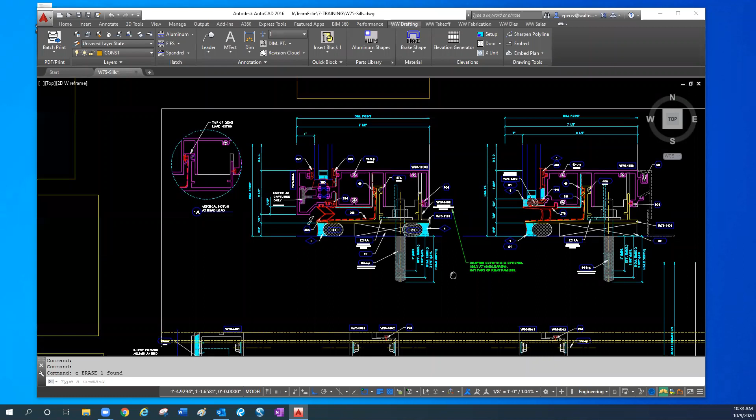Okay, so I'm just going to assume that you don't know anything, and that's where I'm going to start. Don't be offended if it's too easy or too slow, or if you know stuff already. I'm just going to start at the very basic, as if this is your first time seeing sill detail. So I'm just going to jump right in.

So you have the captured on the left, the inviso on the right. Obviously the glass is the biggest difference, as well as the face. What metal we're going to see versus not see.

You have the sill member, and this is where the terminologies come in place. So this body up here, I changed the color of the sill track itself to yellow. So the sill body, some people just call that the sill or sill member. Some people even call it the horizontal. But you have two different components that make up a sill.

There is some type of body, which is what the glass goes in, whether it's captured or inviso. And then the main part of the sill is this track. This also has various names and terminologies. People call this the sill runner, sill track. Some people call it a pan even. Starter track, starter sill. That's all relating and talking to the same part.

The reason they call it a starter track or starter sill is because this has to go in first. This yellow part is a field use item, and the field has to lay this guy out first, and it's not done in the shop. So everything related to this sill track or starter is all done in the field. That's kind of just a big separator between these two. So you have this sill runner or track that has to be placed first.

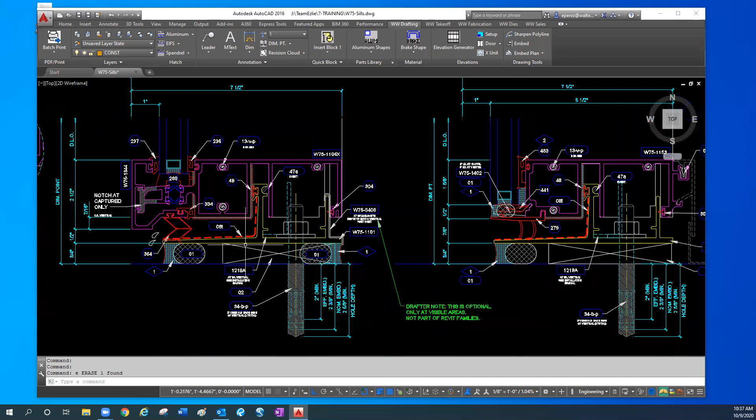So if I look at our vertical mullion, I'm just going to pan down here really quick. That index clip literally goes inside the mullion here, somewhere inside this cavity. And I actually think they put it in the bayonet raceway here. Okay, so if this were, we were looking at the top of that index clip, it would be right here at every mullion.

The reason why we need it is because you could see how we have this 1/4 inch gap between the verticals. So if we didn't have the index clip, this 1/4 inch could get smaller or bigger. These mullions could move, so it could accidentally be spaced wrong. So the index clip helps the field lay out the units next to each other, so that they truly maintain the 2 3/4 overall dimension from the male to the female. And so that's the purpose of the index clip.

Okay, so the index clip has to fit inside the mullion. So if you have a wider mullion, you're going to need a wider index clip. That's why we took off the notes here that said the size. We used to call out the size, but it was only true at a 2 3/4 vertical. But we've had jobs where sometimes they have a 4 inch vertical or a 3 inch vertical, and then you would end up having to call out all the different sizes, which nobody was doing. So that's why we now wanted to build the logic in the installation manual that tells the field, the shop, that they have to take the width of each vertical and size it down a certain number to get the size required per vert. So that's why we took out that dimension here.

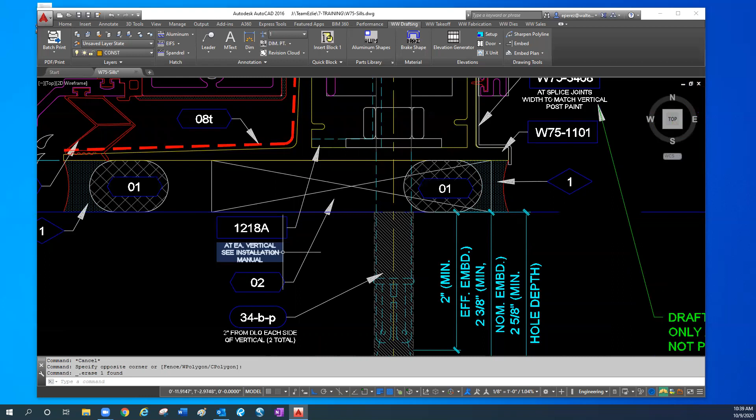Also, the height matters because this line down here represents the bottom of the vertical, so it has to fit inside it. As we've seen, when these mullions get taller, or these stack joints get taller, the bottom of mullion gets higher, then the index clip no longer works. So it has to have proper engagement to do its job. That's just something we have to look out for when we get taller sill tracks and taller sills, to make sure this index clip is fully engaged properly. And that's why some jobs we had to go with a taller index clip.

Okay, and this index clip is only shown in the sill. So I have the little ISO from our manual here to show what we just talked about. So you have the bolts that go in sill track to sill track. This is 2 different sill tracks. It's what we call our splice location, where 2 pieces come together. I haven't yet talked about the splice sleeve. And then here's the index clip, just a little visual, that it gets pre-attached to the sill track before they put in the units.

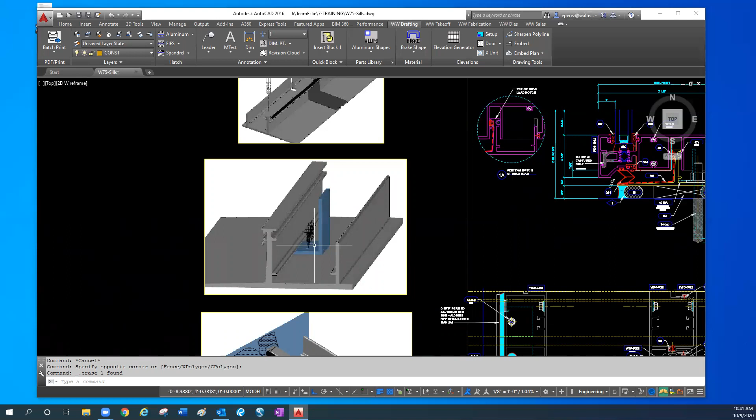And again, that's all done by the field. So they have to lay out all the mullion layouts to know where all these index clips need to go before they can put in the units. And it's just attached with 2 fasteners, 2 little screws.

So the other question that comes up sometimes is, we've seen it in a lot of details where the engineer wants to beef this up, or we've seen some where they put 2. It's just because they're worried, or they feel like this clip is taking a lot of movement and that maybe the units will shift. But again, that's where the logic doesn't really hold true, because it's really just an index. It's not structurally doing anything. So that's why it's a little odd when the engineers do that. But that's something Jumpstart needs to figure out and talk with our engineers, because really this clip is not taking any load. It's just truly an index to space our units.

Okay. All right, so then we'll lead to splice sleeves. So again, as I mentioned, this sill track can span 20, 25 feet across an opening, and then it has to stop, and then another one has to start. So again, we have a splice between 2 parts.

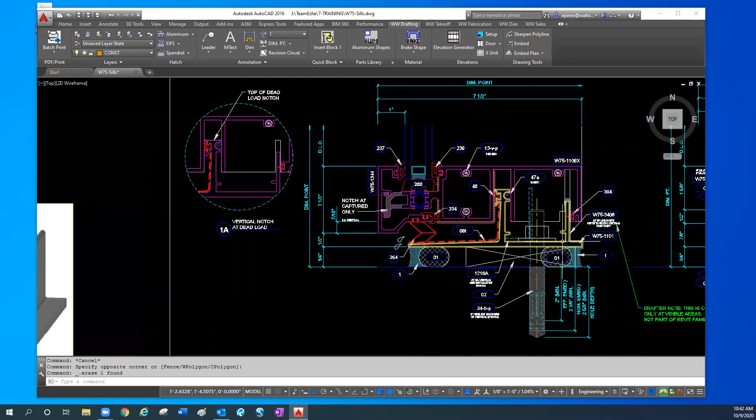Usually that splice gap that we leave between the 2 parts is a 1/4 inch. This red dot here, the 08T, that's our splice sleeve and how it's shown in this detail. And then here, I just wanted to show you the ISO of it. So that red line represents this little black sleeve.

That's basically called Dow 123. It's a silicone rubber sheet, basically. If you imagine a big white rubber band that's flat, that's what this material really is. We model it in our details like this as black, but really it's clear or white.

If you see it out in the field, they just smother it with sealant. The reason they have to smother it with sealant is because water can get between any little crack. Now that you have two pieces together with a big gap, you want to make sure all of those gaps are covered so that water won't go through those cracks. So they will cover this whole thing with sealant. Even though our drawings show it all nice and pretty, they really just smother it with sealant.

And then they have to smother going up and over what we call the chicken head of the sill track, so that if by chance water pools up in this cavity, it won't go up and over, because behind the sill track has to stay dry. That's what we call our dry area.

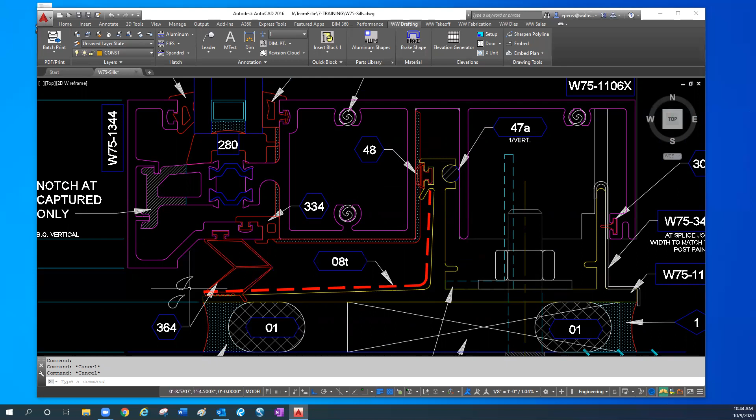We are allowing water to be in the front cavity, and we expect it to weep out. So if we go back to the detail here, we are expecting water and allowing water to come in this front area in front of this gasket 48. And then if any water comes here, we're expecting it to drip out. That's what these little drips usually we show in our details. It just shows if by chance any water gets in there, this is where we expect it to come out. And we're okay with water being in there.

That's why that sealant at this splice sleeve is super critical, because we don't want to let any water come up and over, because once it gets behind this chicken head, now that's basically a leak. That's where we can't have water back here.

Why don't we call the sealant out? Like, or is it just known? It's just known. So that's why it's kind of in our installation manual.

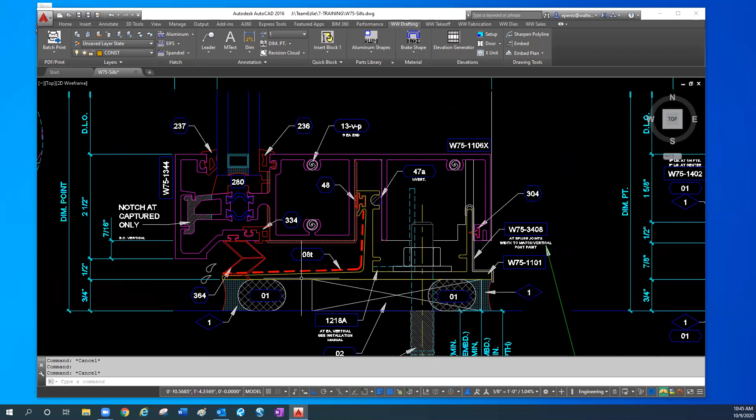That's one of the field installation steps they have to remember to do. In our installation manual we show it and say bed in sealant, and they just know that's part of their training. All splice sleeves, fully bed in sealant. But we don't show it in the drawing. There's stuff that's happening that we don't always show, and that's just for clarity, because otherwise this would just look like a big smother of sealant and a hatch, and you won't really see the detail anymore.

Okay, so that's the sill track and the splice. So then just to go over these gaskets a little bit. Gasket 48 is what we would call a dual compound gasket, which means this back part is one segment and this is another, so you can see why the lines are drawn like this.

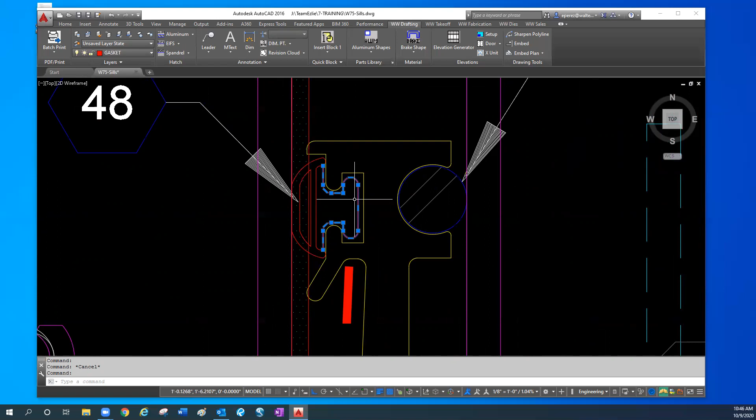This back part is like a hard plastic so that it doesn't move. It literally gets slid in, it doesn't get wedged in, it gets slid in across, and again, imagine 20 feet long.

So if I show you over here, that's what this is here. Sorry, bad picture. But the shop has to slide that in the raceway, and they just slide it in the extrusion the whole length. That's a plastic piece so that it stays put, because this is the critical water gasket.

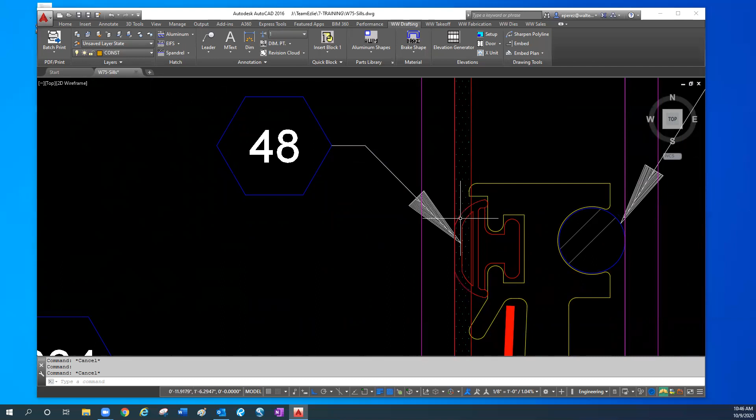And then this front part is actually squishy. It's a soft gasket durometer where it can squish, but the back is a hard plastic, and that's on purpose. The squishy part is so that when they install, it'll smush between - you can see how it touches the sill member here - so it can squish and won't be rough, but they don't want this part ever moving. That's why they make this a hard plastic, so that stays put.

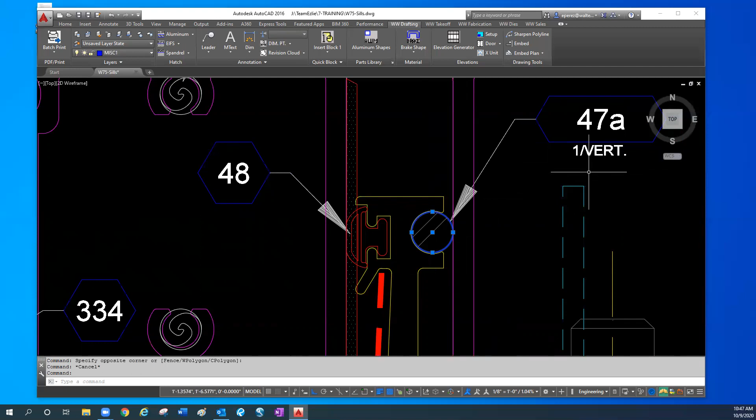Then you have this guy, this 47A. This is actually an aluminum rod. I don't know if you've seen one before. It's like a straw, but it's about this long, 4 inches or so, and it's an aluminum piece. We say 1 per vert, and there's been a little controversy on that, if they actually put it at the verticals or not. I'm not sure.

Sometimes they say, I've heard Kendall say, it doesn't have to be at the mullion. It could be just anywhere, because it's just to help ease of installation of the sill track so that it can kind of roll in its place when they're installing it. It'll kind of spin on itself so it rolls into place. The more it's done at a vertical, it's maybe more friction, so it doesn't have to be at the vert. I don't know exactly where they put it, but we call it out one per vert just for quantities. I don't know exactly where the field or shop puts these, their actual spacing, but that's the purpose of it. It's for install, and it's round so the unit can roll over it and not get stuck.

Okay, so far so good.

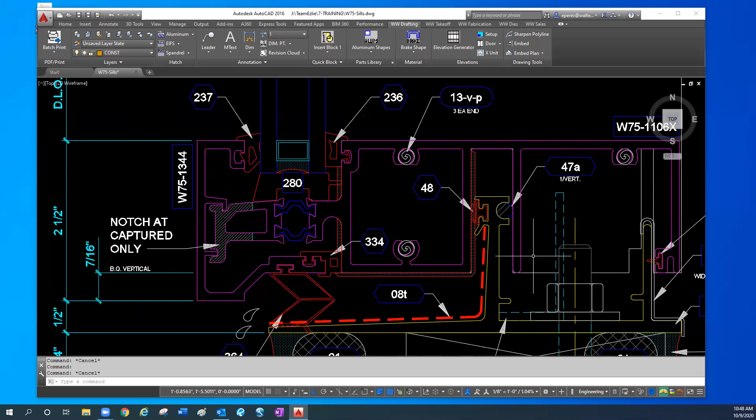And then the new little guy is this little thing here. This is a new design, copied from our Seattle office, and really all it is for is looks. Because if you imagine our little detail here, on the inside, if we don't have that piece, this is just a big gap, and they're saying that doesn't look good out in the field. So we came up with that design to just cover over this little splice with metal. That's all that it's doing. It's almost like a splice sleeve, but it's exposed, meaning you can see it, and it's made out of metal, not rubber, and it's only at these splice locations.

These splice locations happen maybe at 20 feet, so it doesn't happen at the vertical. That's where a lot of people get confused, because our 2D detail makes everything overlap, but you don't see the space. So it looks like it's hitting the verticals, but this is not happening at the verticals. It has no relation at all to the verticals. It's really just for the splice sleeve, at the splice locations of the sill track, which could happen mid-span of a unit, nowhere near a mullion. That's where the 2D details are squished, so you have to kind of see it in space and know where these things are happening in relation to the sill track itself.

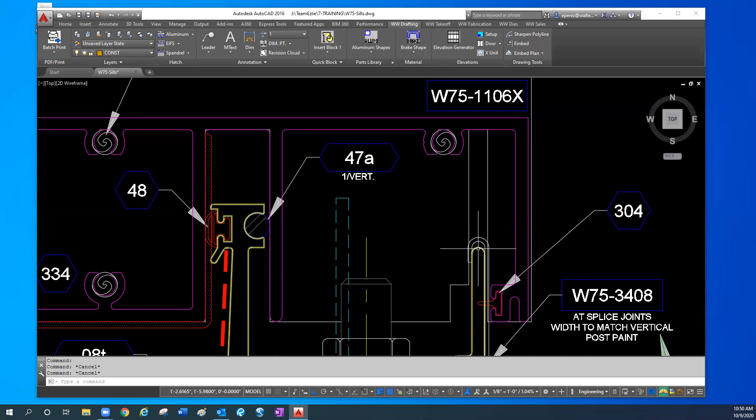Okay, any questions so far?

Okay, good. And then you've got this gasket here, 304. This is way in the back, and again, it's touching the sill track, so that's another critical seal. That's an air seal, basically, not for water. Air is going to get in here from just natural airs blowing, and this is helping prevent the air from being sucked into the building, so you don't hear whistling sounds, and it also helps prevent water, because usually air will suck water in with it if it's strong enough. So this is just our final line of defense for air and water, and that's a critical gasket for the system to work properly.

Okay, so that's the sill track. And as you can see, from Capture to Inviso, it's exactly the same. Sill track, sill runner, the logic is always the same. Like I said, the only variable is if the track gets taller, because of the different loads we're taking. So Captured and Inviso, everything's the same.

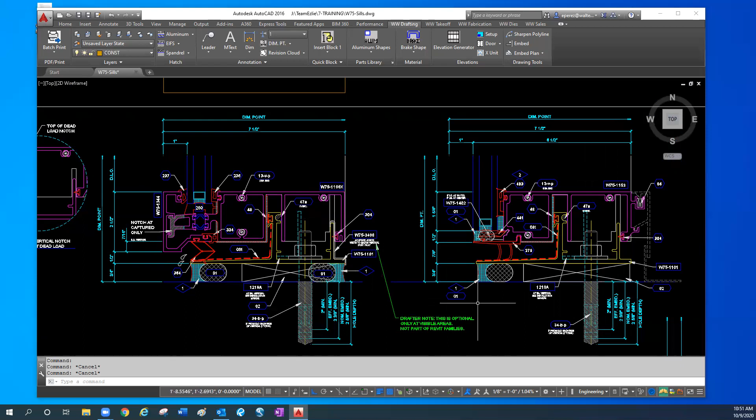So then this leads to the vertical, how it interacts with the vertical, and these notches here. You're familiar with these lines, which represent the notch in the vertical. Remember, this sill track runs 20 feet or so, and units are just going to go over it. So in order for the units to go over it, they have to be up and over to capture and go over these parts, otherwise they'll collide. These lines represent what's happening at the vertical itself.

As you know, there's a difference with a live load, which is when the notch has allowed space between the chicken head and the mullion. So this mullion is literally hanging, floating from above, and it's allowed to move up and down. That's what the live load is. And we have all these notches in here because if I move this down three quarters... oh, see, even that notch is the wrong size, see?

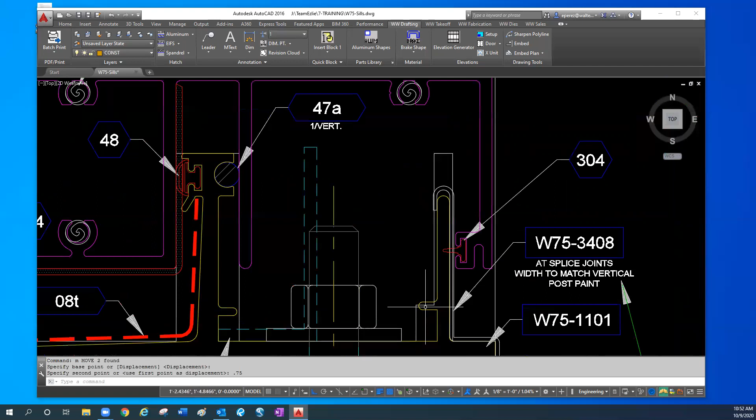But it's supposed to clear these parts. So in a worst case, if the mullion does move down 3/4 inch, which is the maximum, it should not hit anything. So something's wrong here with this notch, it's probably the wrong size. But that's how those size of notches are created, and that's the purpose of them. So then if I move this back up 3/4 to where it's supposed to be, this is how the system is designed for the mullion to be able to move up and down. And 3/4 is the max for this particular one.

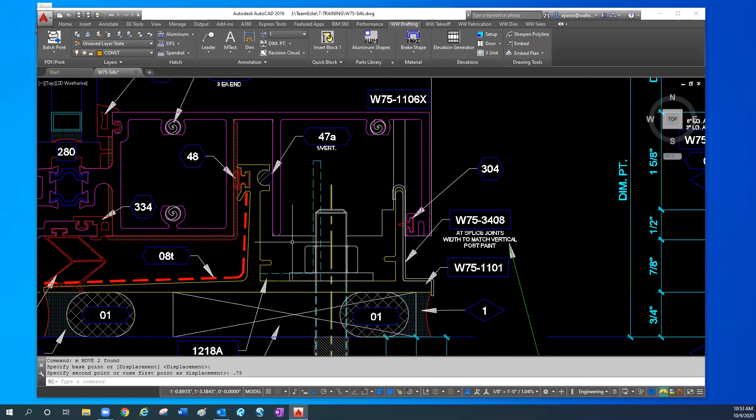Okay, just keeping that in mind, to talk about movement real quick. So remember, this sill member, the body, is attached to that vertical, right? So if the vertical moves down, this would move down with it. Let's see what happens, so I'm going to move this all down 3/4. Okay, so that's the worst case. So this gasket would get smushed, compressed fully, but you can see why we designed the face cover the way we did. See, so that it clears it in case it goes down that much. So that explains a little bit of the design and why we do that.

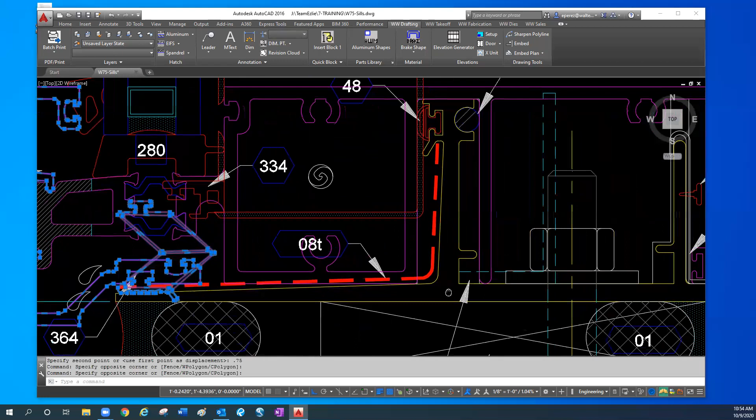And then you can see how critical it is that the sill body itself, the bottom of it, is equal to each other, you see? Right, so these back legs have to align with the bottom of that. Otherwise, if it moves to its worst case, it won't work. So those are just also little tidbits to see how the system is designed, how it should be designed. So if you see something where maybe this leg is lower than this body, we have a problem, right? Or if we see a captured face that doesn't have this offset, we'll have a problem. So it's just kind of giving you little insight into the design so you can see why, or if we have a problem, potential problem. But that's why it's designed this way.

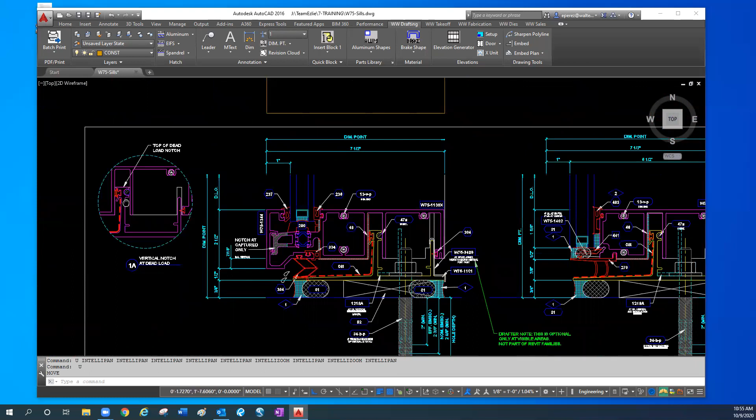Okay, so then you have the dead load notch, which again is the notch in the vertical. And that's where it's notched specifically to sit or rest on this chicken head. And that's where all the weight is going in this case. So now it's no longer floating and it's not expected to move at all. It's just sitting and resting on this part. So that's the only difference between wind load and dead load, the notches.

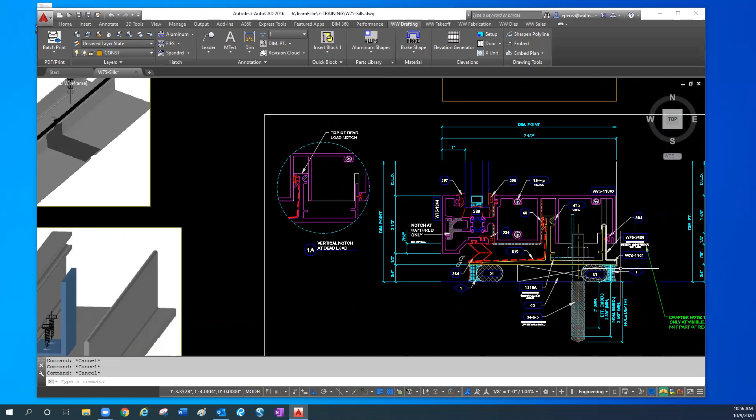So if you look in our details, again, we took it out. We used to show them in the side view, but it was just too cluttered and usually it was wrong. Okay, so you will not see an end dam in our sill track details. You'll only see the end dam in the jamb details. Okay, so this is your end dam here. Okay, so all of these lines, the hidden lines, represent the legs of the end dam. And I'm sorry, I can't see the back one here, but imagine this end dam has another leg sitting in this back cavity, just like it's detailed here. Okay, and then you can see that it's offset by 1/4 of an inch from the edge of the mullion.

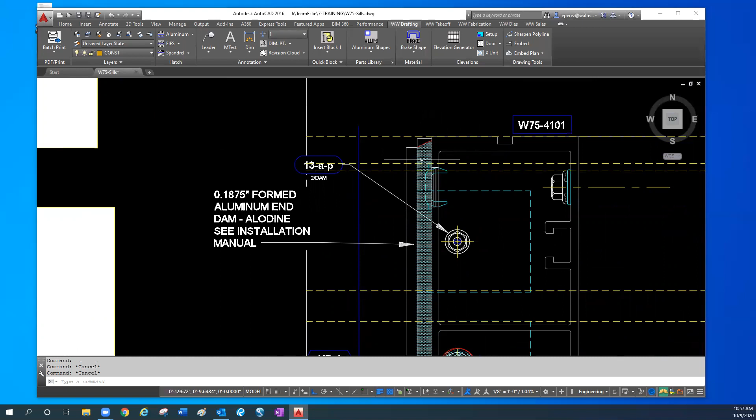So again, that's like another splice or a purposeful gap for sealant. So you can see we show all of this sealant here. So that gives the field a nice spot to put sealant and have space, because the more sealant they can put, the less chance water is going to get through. Okay, so this whole thing is bedded in sealant. So again, we're a little generous in our detail, but this is not even how the field would do it. They would smother it, again, completely smother it with sealant. Because you don't want any chance that water can find a little crack and get through, because when two pieces of metal come together, there's a chance that water can get through.

So they have to smother it with sealant so that water can't get through. Okay, so they smother it with sealant. And then again, there's a reason why the front fastener is sealed and not the back. Do you remember why?

So why do we have sealant on this one, but not this one? Because that first one is where the water would be. It's like the water zone, and then the back one should be the dry area. Exactly, correct. So there's a reason for that too, right? Sometimes people think, oh, just seal them both. It's like, no, this is intentional because there shouldn't be any water back here.

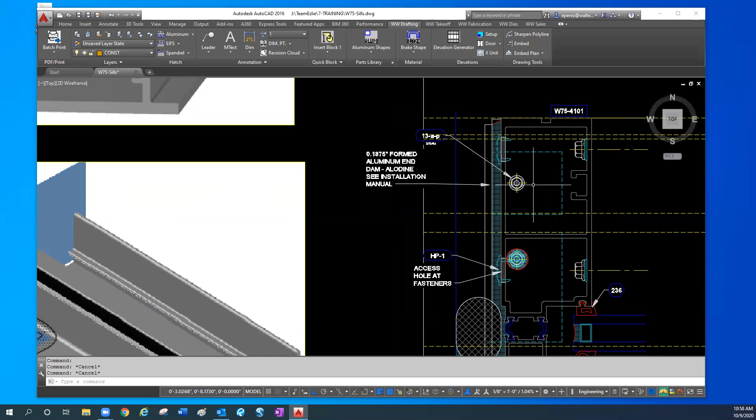Exactly, right. So that is on purpose, it's not a mistake. And that's what's holding this end dam in place, and it's attached to the sill track itself. So again, it has no relation to the mullion itself. It's not touching the vertical at all. It's strictly attached to the sill track.

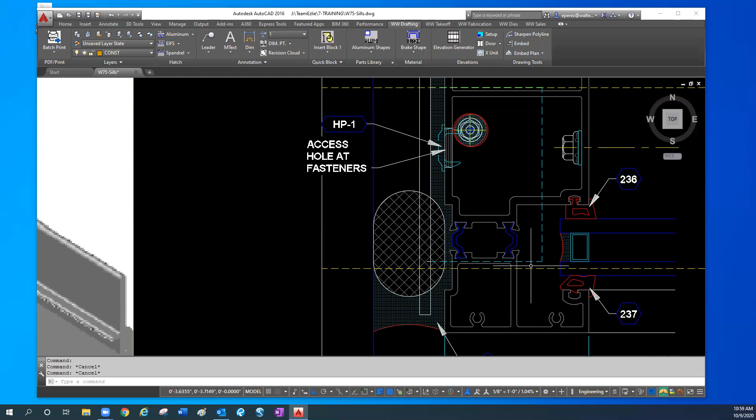Then the only other little caveat to look out for when we're talking about standards and end dams is this leg here, the vertical leg that's sticking up. So you can see in this detail, it's sticking out this much. And that's on purpose because that's where the sealant is going to be for this captured vertical. But when you have an Inviso, we chop that leg off. So that's the only visual difference of the end dams, if it's a captured versus Inviso jamb.

So that's just so that it doesn't stick out when the field is doing this perimeter seal. Because if you imagine on an Inviso, this sealant would be back here, and then this leg would stick out, and we don't want that. But otherwise, the logic of an end dam and everything's the same.

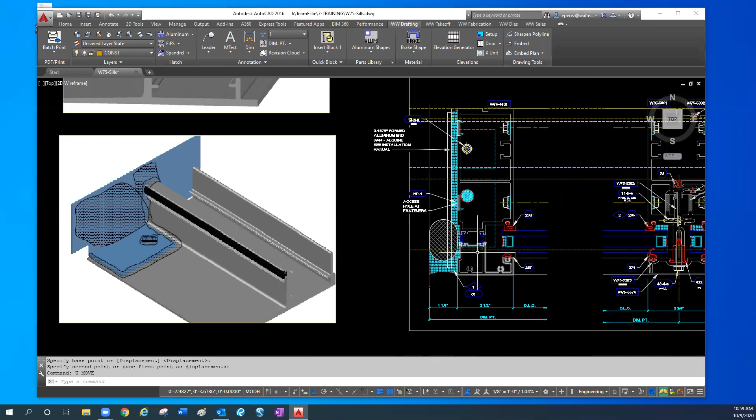Our standard is 3/16, and we recently changed it from Alodine to painted as our current standard. And it's painted black, I believe. Okay, so that's the end dam at the end. We went over the splices in the middle, index clips at the mullions, and the notches on the verticals.

Okay, so now we're going to get into a little bit of detailing, also logic, so that you can check it as well as understand how this relates to the vertical members that it encounters. I'll also show you a little bit of drafting tips, I guess you can say. So as I mentioned, you have a 2D detail.

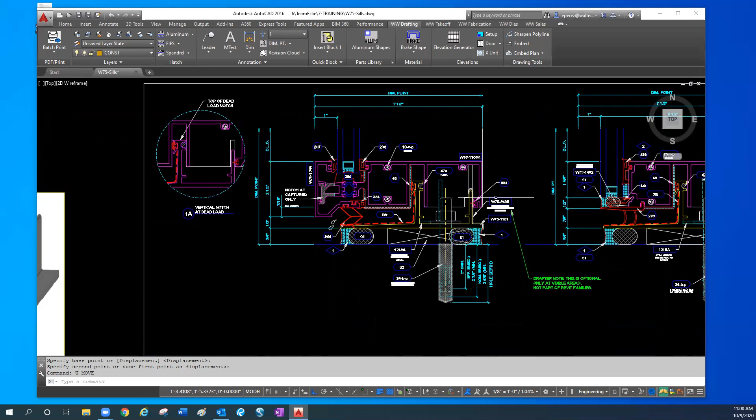And right now, if we just look at the sill track, there are no dimensions. We don't show any dimensions to it. So how do you know how it relates to the vertical mullion in our vertical details? The way I do this is I look for a point that's consistent. So in this case, it's the back of system.

So if I just draw my construction line from the back of the 7.5 system, draw that down, you can see the back of the mullion aligns with the sill track. So I use that as my guide. So there's the sill track. Okay, so I use that as my guide.

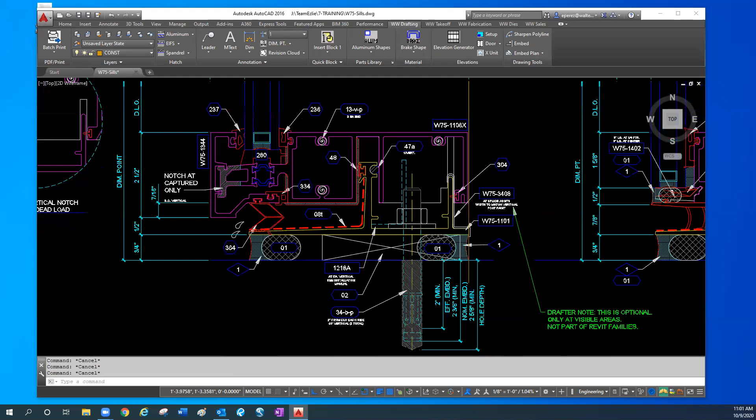So what I do to get this in relation to the verticals is I do a Control-C. I'm going to copy this sill track and use the back corner of the sill track because I know that should equal back of system. And then I go down to my vertical detail, and do a Control-V and paste it.

Here, let me just show you. I'll do Control-C, and take the corner of the die. Click on it. Okay, then I come down to my vertical detail, Control-V, and I use the back of the mullion as my reference point. But now it's in the wrong orientation, so then I'm just going to rotate it using the back corner again, just 90 degrees.

Okay, so now I have kind of an orthographic side view. So I'm going to just move it, make sure my ortho is on. But now I have an orthographic side view, and that's how I got these lines in the right spot. And those lines, as you can see, represent, if we were looking down on this sill track, we would see these edges. So this is where the back leg is, or this upturned leg. I don't know what we call this upturned leg.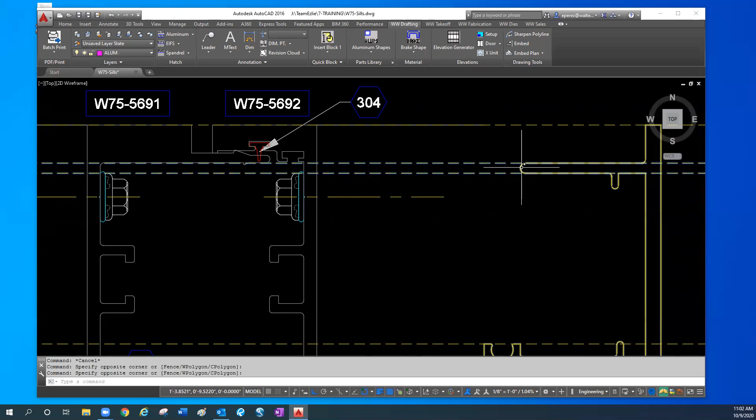These lines represent the chicken head, so you can see where it falls in relation to the vertical, and then the front of the sill track itself. That's where all these yellow lines are. So that's all I did, and that's how you can make sure you get it in the right location.

Okay, so I have it already over here. All I did was copy and trace all those lines all the way across my vertical detail, so you can see how that sill track relates to the vertical mullion looking down on it.

Okay, so one little thing I noticed by doing this. I was just going to ask, in this jamb view, when I'm drawing my lines for that sill track, is there a standard stopping point, like an offset from the inside of the main body there?

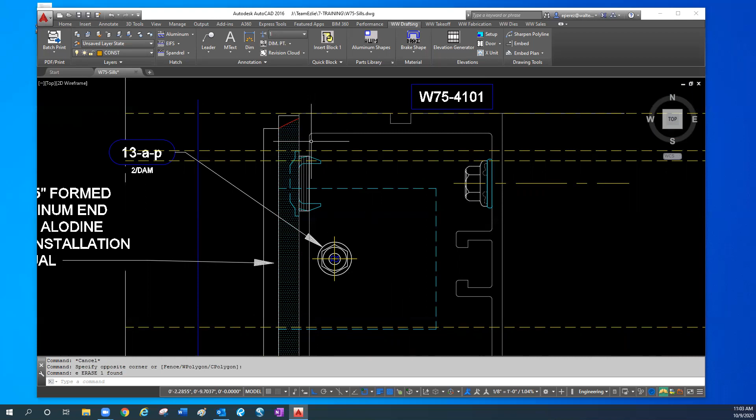Yeah, so that's a good question, that's a fab logic question, but I was just about to go over that. These lines are supposed to represent that sill track, but you can see they're off, right? Because this was our old W75 lines, and nobody's fixed that. But only by doing this exercise did I notice that. So that's technically wrong - the standard details should be updated.

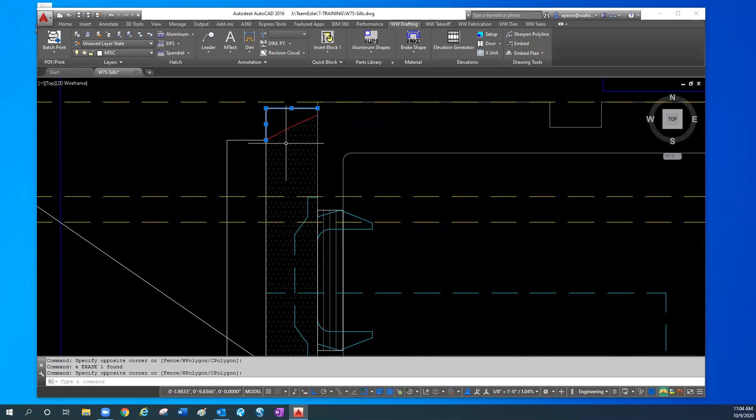But the other caveat, just like what you said, is I don't think we run that edge of sill track that far anymore. You don't think it comes that far? So, for example, I have a detail up on my other screen showing the sill track. It's showing it almost all the way, but maybe not even a 16th away from the back of that main body.

The back this way? Here, let me mark it - sorry. It's actually shown stopping a little closer than that, to the inside edge of the, yeah, inside edge, there we go. Right, yeah, exactly, and that's the thing - I think it does stop there. So that's where, see, again, we have an error. See, and so this is why it's good - that really shouldn't even be existing on this. This shouldn't even be there.

Yes, okay, exactly right, no, you're exactly right. See, that's why it's good to understand it, because now you can understand what those lines mean, and now you're able to catch a mistake. So that's the power I want to give you - you should know what those lines are, and then know, hey, that's not right.

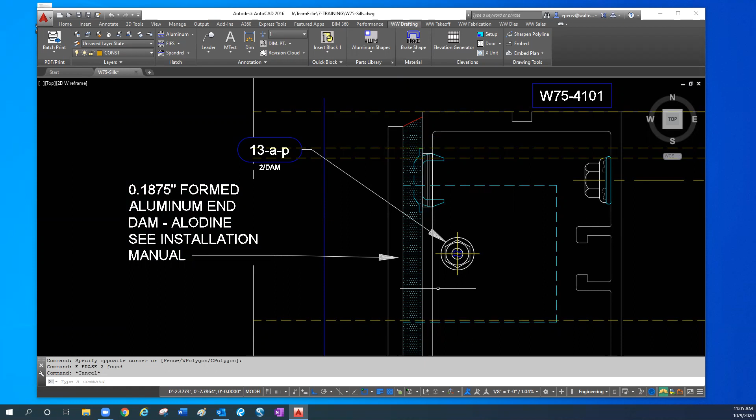So that's exactly right, and like you said, I believe, yes, it is - I'm just going to exaggerate, but I'll draw the line on the inside edge here. Okay, so I believe the sill track does stop, like you said, maybe a 32nd or 16th off of that edge. So that would mean I would have to trim it there if I show these lines. Not anywhere else.

And some details show these lines going all the way through, which is wrong. But you're exactly right - now you know where these lines start and stop, and what they mean. And yes, that's a standard error. We should remove those from our jamb details, because technically that's wrong - that was our old design. I'd say nobody's ever caught that.

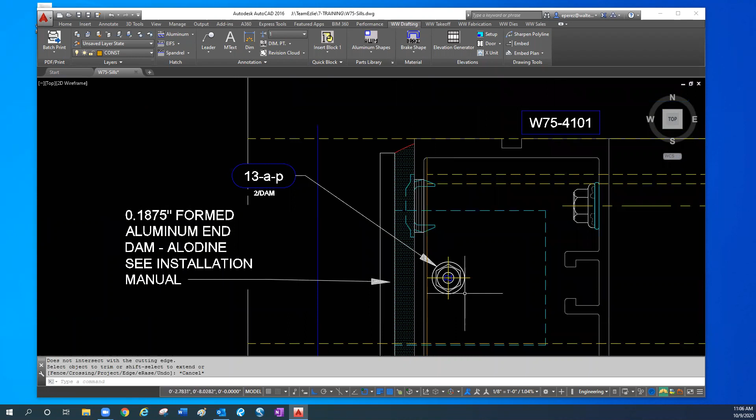But yes, you're right, so now you have power. Oh, you see here? It looks like an error, but it's not. You see how the chicken head overlaps the end dam - it looks like, oh shoot, that end dam's too big. You have to remember the chicken head is higher, and that end dam is down here, so the end dam is technically below it. So it's actually correct - just a little caveat there. It looked like it was wrong, but it's not.

Okay, but that's what these lines represent. And then the powerful one here is the sill track - the front does not go all the way to the front of the system. We have to remember that because that's where the sealant is. So if we look back at this detail, the sealant is way back here - it's really an inch back, an inch and something behind.

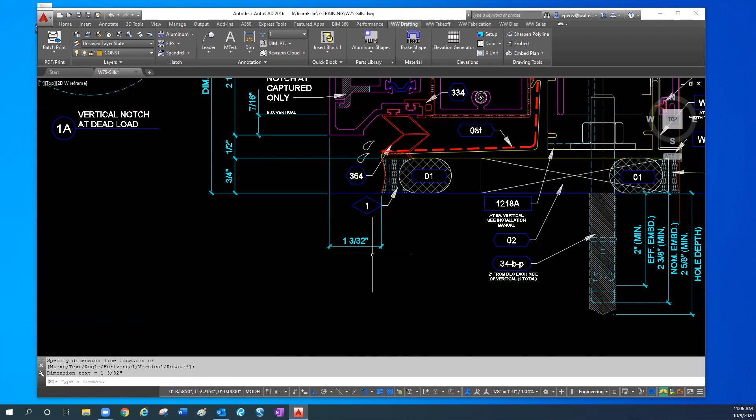So if I'm going to, I wish there was some doodle line on CAD, but there's not. Let's just say, let me exaggerate it - let's imagine how the sealant goes underneath these units. Let's see, okay, yeah, the sealant goes here.

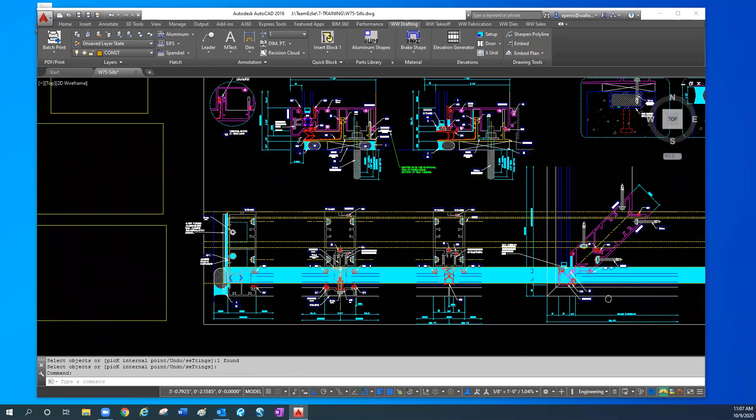Okay, so that's kind of on top of everything, but really it's underneath, right? So imagine that sealant I just drew is this sealant down here, under the sill track. Okay, so it's underneath all of this, but you see how far away it is from here?

Yeah, so that's where the field needs this leg, because now they could put sealant up and across to marry those two together. Okay, so that's why that leg on the end dam is super critical on the captured.

So in an Inviso, huh? Because it's notched, isn't it? On that end dam, it's not notched, it's like this. Yeah, yeah, so that they could notch it. So yeah, that's a standard fab.

Okay, yeah, so that way they can track the sealant all the way underneath the sill track, and then they can marry it with that perimeter sealant, and it actually can touch it.

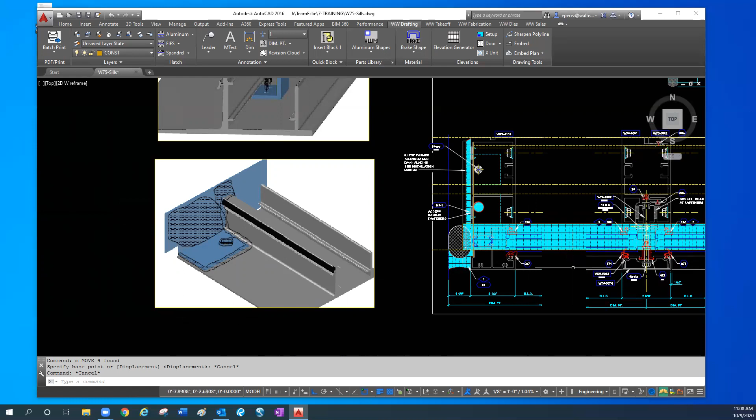Yeah, so that's where, again, you have to think three-dimensionally, but that's why it's good to see where the edge of that end dam or sill track is, because again, the misconception is, oh, it's all at the front, but no. So that's why it's critical to see, this is where understanding how the details relate to each other comes in.

That's why sometimes we see jambs with the sealant way back here, and you can say, oh, that looks fine, but no, now it doesn't marry with my sill track. See, so you can just look at the jamb and be like, okay, that looks fine, whatever. But you have to see how it relates to the parts below it and above it and at the end. And right now we're just focusing on the sills.

We're going to do the same exercise at horizontals and heads and stack joints, so you can see how they all relate to each other and how one little thing, like moving a sealant joint, could affect something else. That's why we have to learn to look three-dimensionally, beyond just the detail itself, because the detail is one thing for standards, but this is understanding the constructability between the other components of the sills, the stacks, the horizontals, etc.

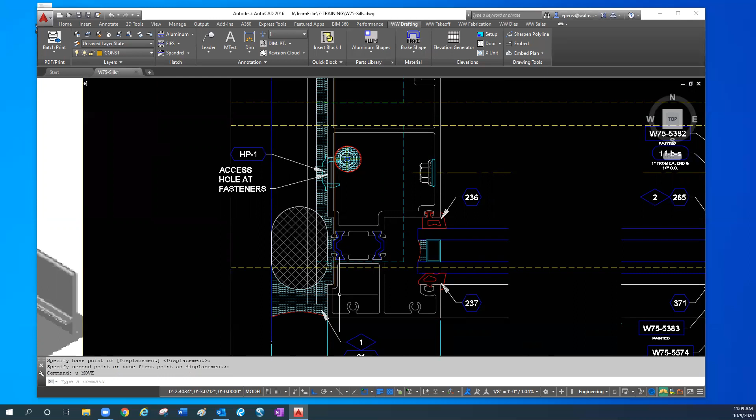Okay, so far so good. Okay, so...

So then seeing these lines, we used to show these in our details to help clarify things, but again, there was just too much clutter, and sometimes they were drawn wrong, because drafters didn't always know what they meant, and they didn't do this exercise of taking the sill track below and tracing it through.

So sometimes they would move the lines, offset the lines, delete them by accident. Some would be there, some wouldn't, like you saw here. Sometimes they'll end it in the wrong spot. So too many errors, and the drafters just didn't educate themselves enough to know what they meant, to check it or do it properly. So it was better to take them out.

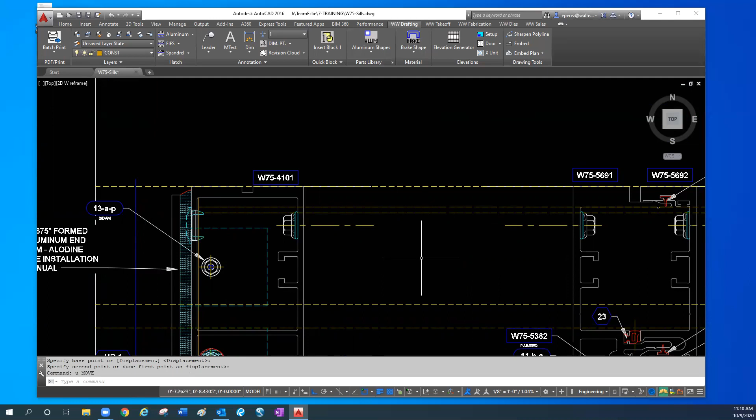Because as you can see with all the lines, it is a bit cluttered. And these inside here would be solid because you could see through them, but over here it would be hidden. It's just a bunch of drafting work that didn't really add any extra value.

But if you have a tricky detail, that's why at the doors we keep it, because it helps clarify where things should go. We can always draw them in on a construction layer or something like that, as long as you put them in the right place.

And you can use them as your own reference for some kind of layout or a tricky detail that you might be working out or trying to understand, because they are helpful, but that's only helpful if they're drawn right.

So hopefully finding a point like I did here that you can use as a reference in relation to the vertical member is always good. And then just making sure you use your AutoCAD properly, insert it using that corner and rotate it 90 degrees, and you should be good.

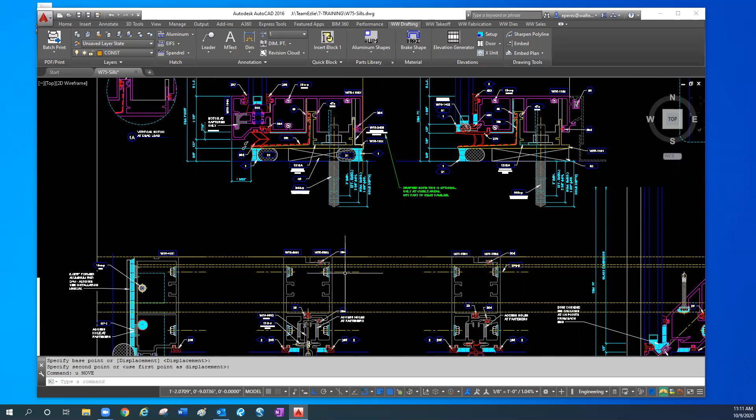Because this also comes into play at the corners, just to see how it relates to the corner body. And if you have some weird stuff going on, it's just good to track it through to make sure nothing is missing, there's no holes, and that these parts interact correctly with the sill track below.

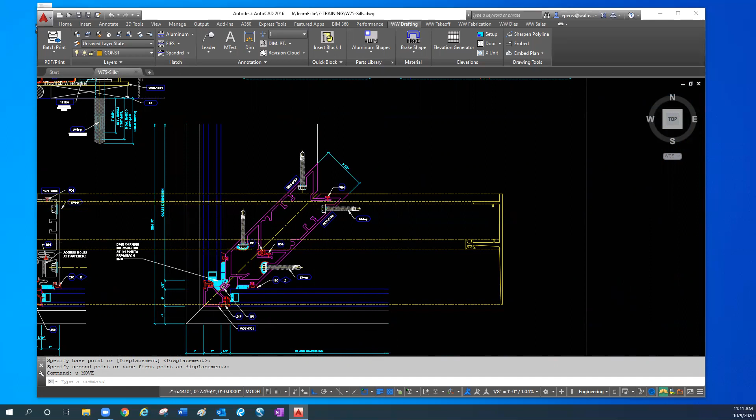Okay, so I had a little exercise planned here just to hopefully visualize things. With what we went over, I just wanted to see if we could put together a little model of the sill in relation to the vertical. So that's all we're going to do as practice. So I have it started, let me change my view.

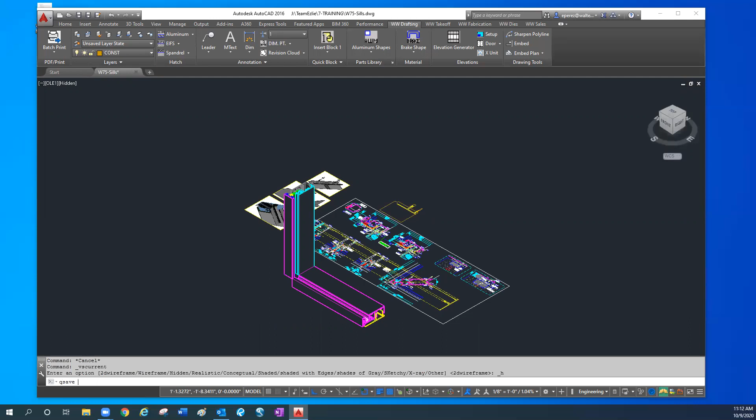Hopefully AutoCAD doesn't crash. Okay, you know what? I should probably split my screen. Oh, come on, out of here. There we go.

Okay, so this will be hidden, this will be 2D wireframe. Okay, there we go, so we can see the 2D detail and the 3D over here. Let me just move it so we have a little more space.

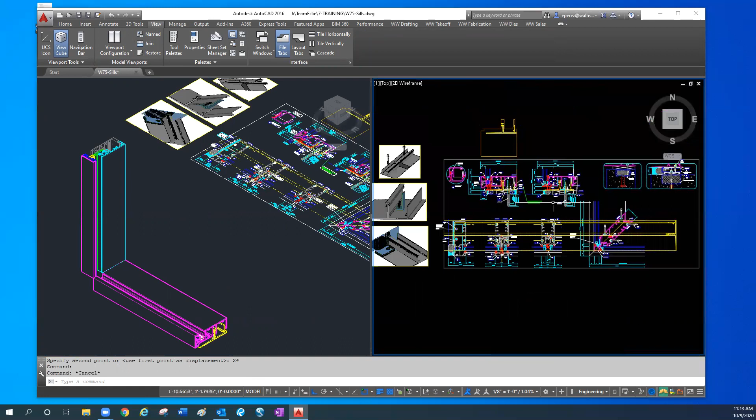Okay, so just to help practice the visualization of where these things go, so we have a sill. I just have the captured sill and the sill track, and all I did was copy and paste them from the detail, so they're in the correct location in relation to each other. But right now I just have it pasted at the bottom of the vertical member, so it's not in the right place.

So from the details, can you tell me how can I fix this? What do I need to do to get the sill member in relation to the vertical correctly in the up and down location? Okay, so are you saying that the main sill is in the right spot right now, or it's not? It's not right now, up and down, it's in the wrong spot.

Okay, so how can I tell from the detail where do I put it? Well, so that, one second. Sorry, it's okay. So that, let's see here.

So in relation, so the vertical, okay hold on, what did I say that was, that main body? That sill main body needs to go up, and the pocket of the glass should be in line with the vertical. Yeah, so it is, it's in the right location in and out, it's just up and down, it's in the wrong spot.

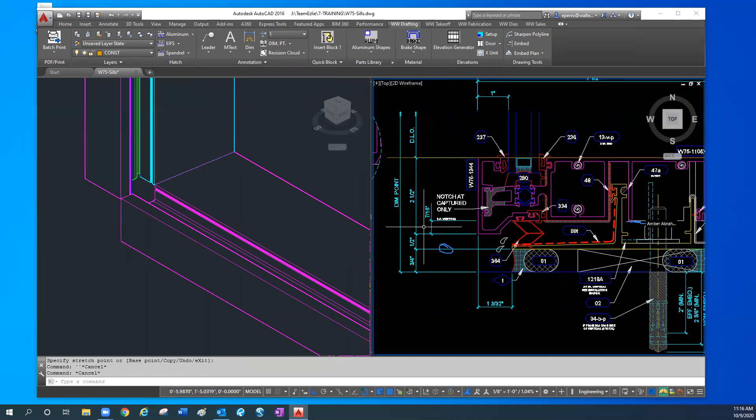Oh, it needs to go down. Yeah. This notch line, because that's what is representing the bottom of vertical. Correct, exactly, yes, very good. Yeah, so here's that 7/16 bottom of vertical little tab, right?

Okay, yeah, so that would be, so I would just have to pull, see again, we don't have this dimensioned any other way, so I would just have to pull a dimension just to see how far I gotta move it. So 2 1/16. Okay, so I'm just going to grab this whole thing and move it up 2.0625. Okay, there we go.

Okay, so now you'll see. Okay, so there we go. So now you can see the bottom of the vertical, which is the cyan notch line, okay, is equal to the bottom of that, which is exactly what we want, which matches our detail, right? Right, exactly, perfect.

Okay, so now I'm going to move just the sill track through, because it's actually going to run through, all the way through. Okay, yeah, so I'm just going to move it so we can visually still see it. Okay, but wouldn't the face cover need to be ran through as well, or not all the way through, but it stops in the middle because it like. Okay, so hold on, we're not going to get to the sill face covers yet. Okay, yeah, but no, we'll get there.

Yes, this is where the 3D visualization helps you see what's wrong with my model. Okay, so now I just moved the sill track through, because in reality it will run through. But now you can see it's hitting. Oh, we need to notch it. Right, so that's why we have to notch the verticals, because otherwise you'll have this and you can't have that. Doesn't work. Right, it absolutely does not work.

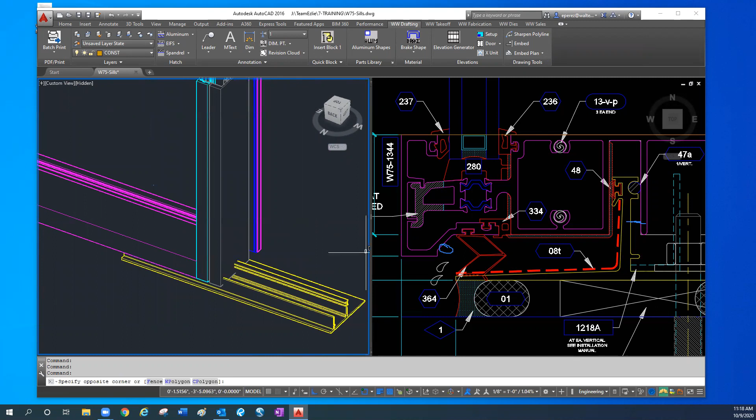Okay, so to do the notching in CAD, I just thought it might be helpful for you to see. All I did was trace that notch with a center line, a construction line, and kept my sill track on as my guide. Then all I do in AutoCAD is Control-C, and again I just keep using the back point because that's my reference point, and I copy that line.

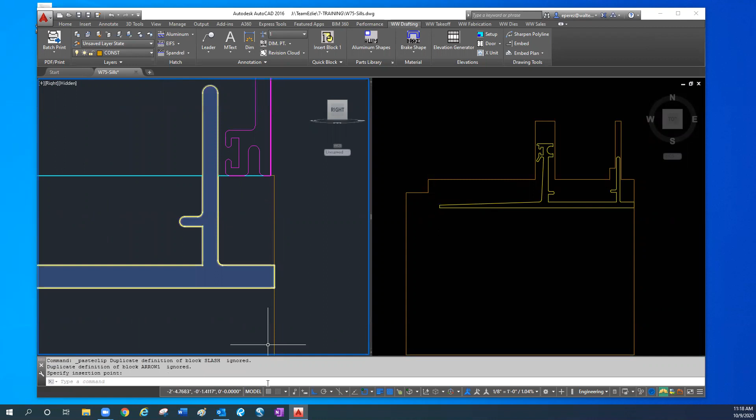And then I go back to my model, and we use a command called VPE, which means viewport end, which means it'll turn it 90 degrees so you're looking directly at it like this. So it's a nice little command. And then I just do Control-V and paste it, using the backup corner of that. Right now it's just a line - you can see it's pasted way at the end. So what I do then is extrude this little thing some big number.

And then, just because I know I'm going to have to do it twice, since I have to notch the male and do the same notch for the female, I don't want to do all those steps again. So I copy this thing before I subtract it - I copy it over, let's say 12.

Okay, and then I'm just going to do the basic notching in AutoCAD, which is subtracting. So I hit SU for subtract. I'm going to subtract from the male, and then select this guy. And now it just notched my male.

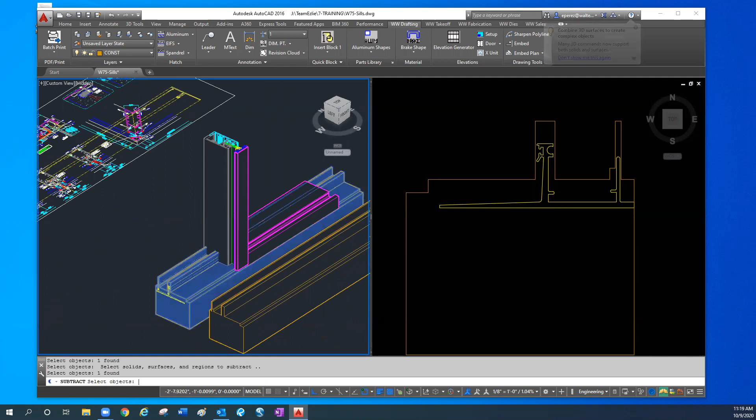Okay, but the female is still not notched because I didn't select it. So now I'll move this second notch back 12, so I know it's exactly the same notch and exactly the same location, and do the same thing - subtract, but now I'm going to subtract from the female. And that way I didn't have to draw that notch twice. So now the female is notched as well.

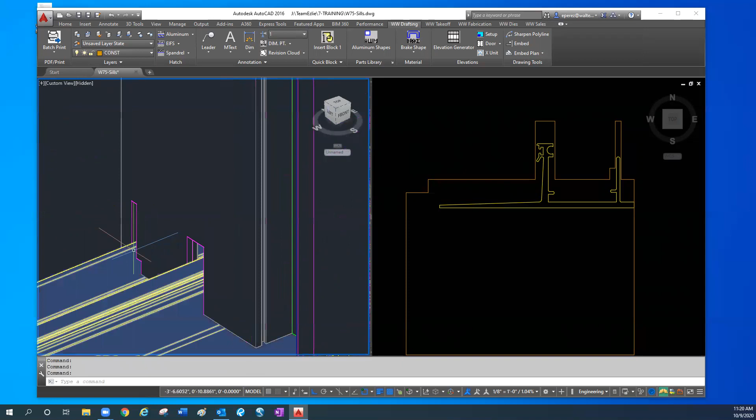So let me move this out of the way for a second. So there you can see now I have the female notched. So that's the whole purpose of the notches there. So now you can see why we need it - they have to notch it to go up and around the sill track, because the sill track is going to keep running through like this.

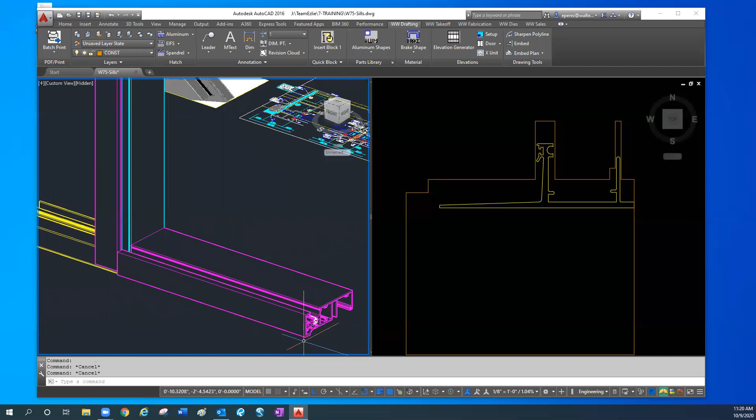Any questions there so far? Okay, perfect. Now we can get to the face covers and all these other parts to see how they relate. So the body of the sill attaches to the female or the male, and we call that the daylight, so it just gets cut straight and gets attached. So this body part is correct, but the funky stuff happens at the front.

Okay, so let's look back at our details real quick, and see if the details tell us anything. Okay, so first of all, this detail does not tell me anything else, so to me it's still missing a little bit of information. We don't show the line of what happens at a captured face, because that line is gone. So again, the line of the captured face is actually here.

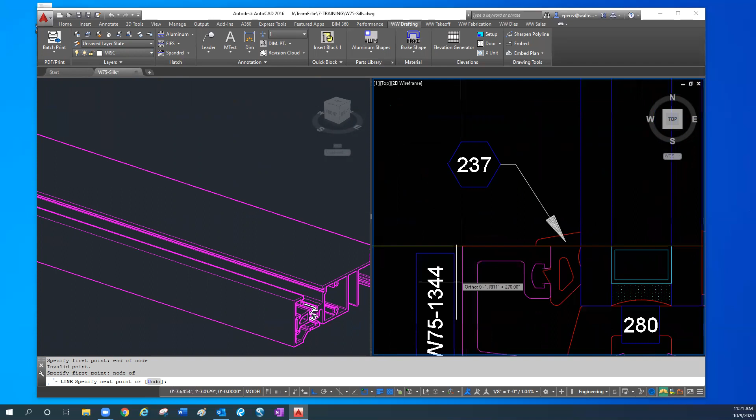Okay, so the line of the captured face is right here. But the line does not stop at the top of the sill - it goes through. And it doesn't stop at the bottom of vert, but right now that's where I have it. Okay, so you can see right there, that's currently where my model is, which is not correct.

Okay, so right now I have everything equal to the bottom of vert, but that's not true. So where should the face cover on the vertical actually end? On the vertical? Yeah, on the vertical. It should stop at the daylight of that. Which would be where? Right here.

Well, so the vertical cover, if it stops up there, the sill member, this horizontal, would then have to run through. Our standards, our verticals run through - captured verticals run through. Okay, hold on, then the vertical should stop. Yeah, the face cover.

Can you zoom out of the 3D one so I can just look at it? Yeah, so right now it's up here. Where do you think it should be so that it looks better?

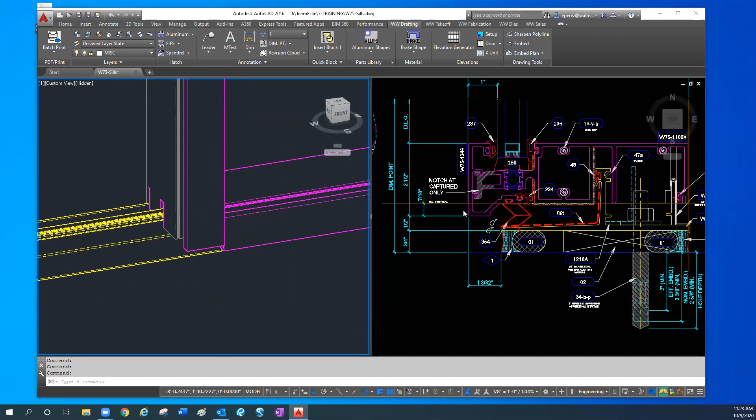It should move down. 7/16. Exactly, perfect. So we don't show that though—see, that's a defect in our drawings. Sometimes we show this line down here.

But yeah, it looks like it's floating. Yeah, that's that notching that comes down. And so now there's some weird spot where something stops down here, but the rest of it stops up here. So this is where fab stuff comes into play—like what goes through, what stops where. Exactly. Yeah, so the face cover itself is its own separate piece.

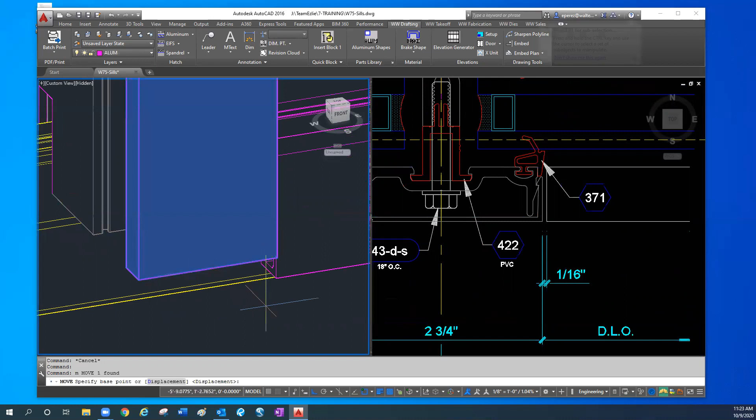So if I look now at my vertical, the magenta is this guy. So that in itself is what's visible—that's the face cover. That's going to be down 7/16. So I'm going to grab that and move it down 7/16. Okay, so now it's a nice clean line.

Okay, and you see that little offset? Yeah. That's on purpose—that's that same little offset you see here, that stupid little O2. Right, but it makes itself evident when you do this. But that's why our profile lines, we're just going to ignore that little offset, because this is what they would see in Revit.

Also, if we kept our profile lines to the face of the sill—that's why we're just going to make the profile lines go to the face of system in our CAD drawings and profile lines. Okay, perfect, so now we have that, which is good.

But then, if we go into our vertical a little bit more, we have this piece, and this piece still. So we know where the body stops, we know where the face cover stops.

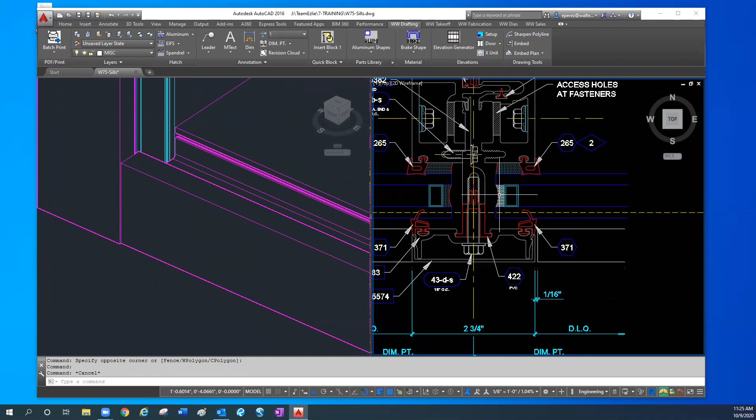So now, this is like what Fab would have to figure out. Fab team, where do these guys stop? And do they need any notches? So that's kind of where you got to think like a Fab person, because detail-wise, we're done. But for them, they have to know, well, where do these stop?

So that's where the logic comes in, and that's where we have to know, at least it's nice to know where they start and stop stuff. So if we stopped this cover at 7/16, it just makes logical sense that this piece also stops at 7/16, because that's what it's attaching to. Okay, but do they do that for sure? I'm not 100% sure that they do, but that's what I would do.

That's what makes sense, but I think they do. I think they keep the relationship of this cover to the face cover the same, because that makes it easy—they have the same cut size. So I'm going to move this in our model, down also another 7/16. So now I'm going to take the blue guy and move it down.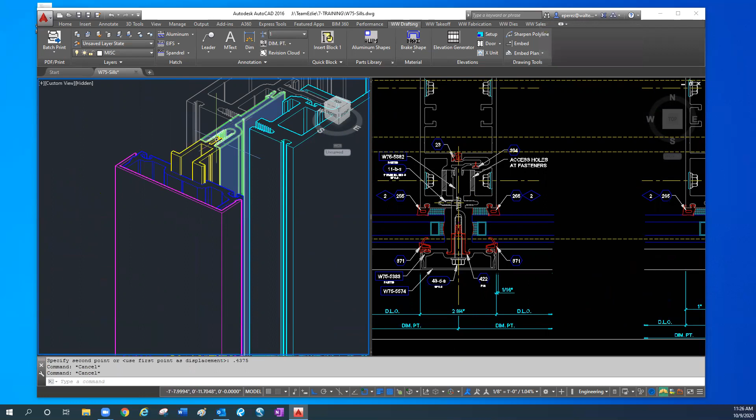Okay, so then we have this guy and this guy. These two pieces are somewhat independent of these two pieces, so they don't have to have the same cutting plane. And they don't have to have the same cutting plane as the body, because technically they're on their own, sort of. So this is where, again, Fab logic has to come in of where do they start and stop, for whatever makes it best for them.

So this is where the Fab team has a little bit of play, because it won't kill us if this is at 1/16 or if it's flush—it doesn't matter really because it doesn't hit anything. There's nothing in that cavity. So you can see the sill runner runs through, but there's nothing here. So they have that whole space to just kind of play with, sort of.

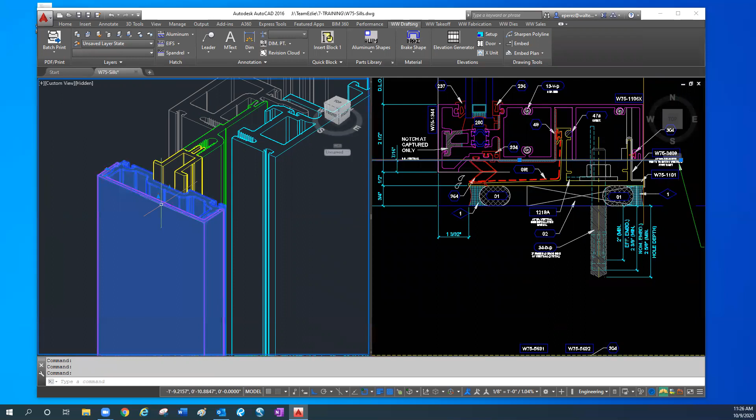I say play, but they could put it wherever makes sense to them. And so I think they stop it at the 1/16 line up here. So I think the only thing that runs down here is this pressure bar plate and the face cover. And then in our details, we usually draw the line that goes up here to show that, and again, that's what's missing from this detail.

But if I dimension this, that's 3/4. And so if I go to the vertical detail and just draw a line from 3/4, those are the only two objects that are in that 3/4 spot. So that just leads me to believe that they will stop this part and this part at the bottom of the body. Does that make sense? Did I lose you?

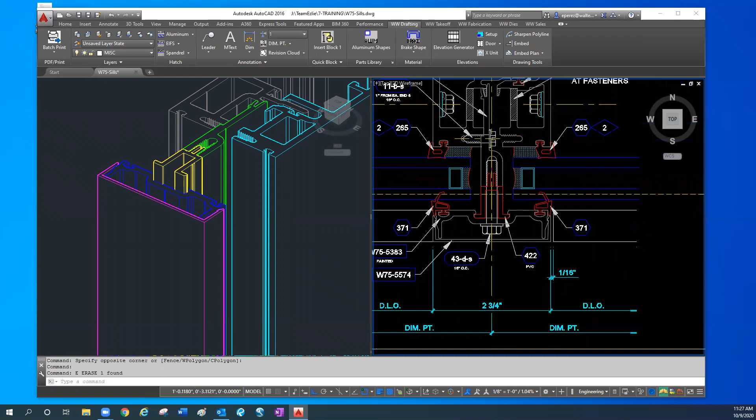No, you're good. Okay, so in our model then, again, if I just move these guys out of the way for a second. Okay, so this is where we are.

Okay, so now let me do BPE. Okay, so now if we look at my model, now it looks closer to the sill detail. Right, does that make sense?

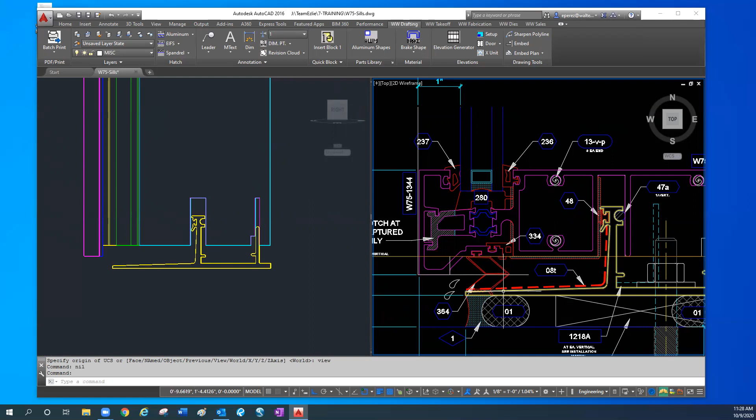Yeah, I see it. Okay, yeah, see, so that's what we're trying to depict in 2D, what's happening way beyond in that plane at the mullion level, but then also what's happening way over here at the splice sleeve level. So that's why our 2D details are very hard to understand at some point. Hopefully this exercise is helping visualize things so you can kind of see what relates to what.

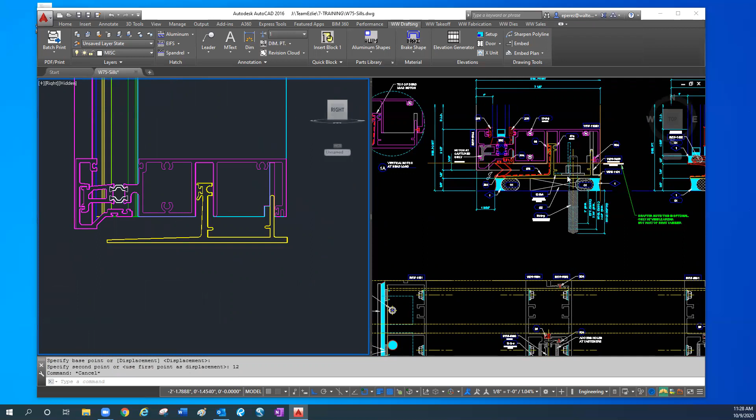So I'm going to move this back 12 so you can see how it goes together and see how that matches that. Okay, and all I'm missing is the anchor and the index clip, right? Right. Okay, so all of that logic still applies if it were Inviso.

Okay, so I don't want to ignore the Inviso, but the only difference is I don't have a captured face to end with. So the vertical cover, if I have a vertical captured that butts to an Inviso, again, it kind of may look weird. Usually architects don't do that normally because it doesn't look good normally. But that's where I don't know for sure what our standard logic is of that. So if we had a captured cover, I think we would stop it here at this plane. But I'm not 100% sure.

I mean, we could stop it here because there's nothing to align with on this side. So I don't know what our standard logic is for that. But it doesn't happen really because it's not really a nice looking design. But that doesn't mean it won't happen. But that's where you have to think about it beyond.

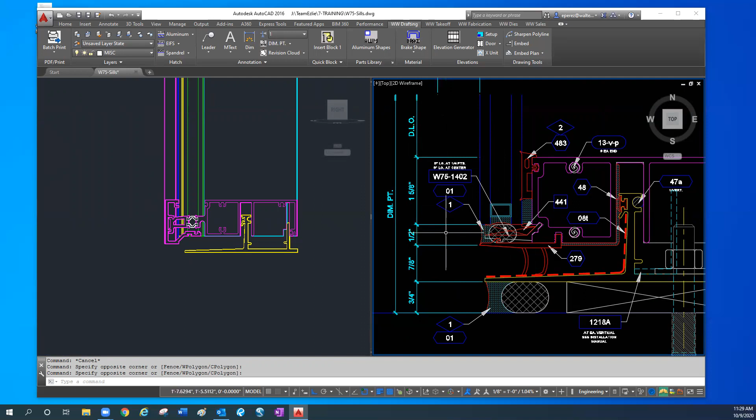And even though our details don't always show it, that's why it's always good to not just look at the sill by itself. It's good to look at, okay, what does my vertical look like? So then you can see, do I have a captured face? Do I have an extended cover? Or do I have an Inviso vertical? So that way you have to see the details together so you can understand how they relate to each other.

So that's why usually when I see a profile set that has some kind of fins or extended covers, it's good to go to the elevations to see, okay, if that's where the cover goes, what happens at the ends? What happens at the jambs? What happens at the vert? Does it hit a corner? Does it hit a soffit? Because now you have to see what that piece start and stop.

So you kind of have to think of like a fab person. How would they start and stop this thing? Where would it go? Especially if we don't show the lines in our details, that's where we find mistakes from Jumpstart. They may have missed it. They didn't show the lines. So we don't know where it starts and stops.

So that's kind of stuff you just think about when you're reading or looking at some sets of drawings. Anything that's sticking out, we should see how does it end and what happens at each vertical condition that it butts up to.

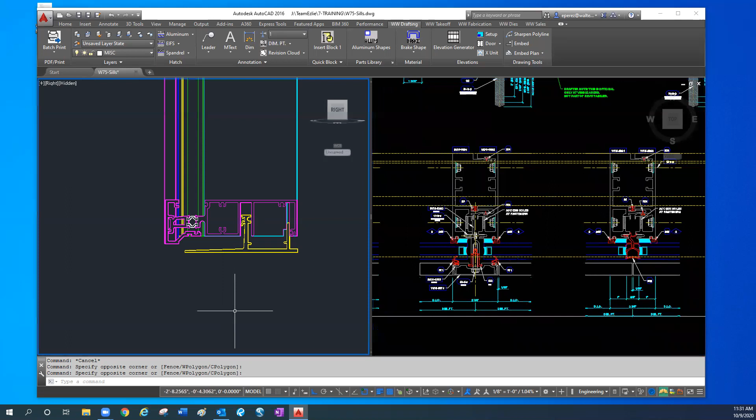Okay, so that is this guy. Let me see, anything else on this? I think that would be the basic intersection of a vertical to a sill.

Oh, one more thing, sorry. No, there is one more thing. So on our verticals, there's a little cue for the cap, a little cue they give us for this captured cover. So that's what these lines represent. These two lines represent the lines of the face of this guy and the back of pocket here.

But you know, there's an inaccuracy because see, they're not showing that 0.2 offset. Really, that should be 0.02. It should be in like that. See, so again, another error, right? But to be accurate, that is how those lines should be.

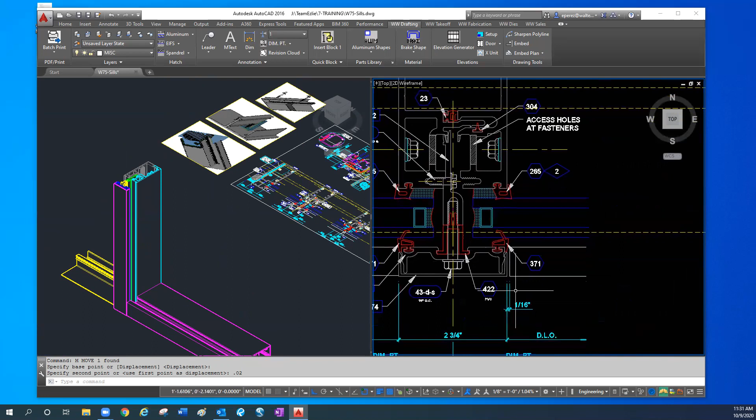Okay, but you see this little gap here, this 1/16? Okay, so that is on purpose, just on this side, this left side, on the female side, correct. So the reason for that, so let me move this.

The reason for that is so they have space when they install it. If you think about how this gets installed, this sill member with the captured face is already attached to this female unit. But this captured face, all of this, is part of the male unit. That comes in separate. Let me grab this and move the sill track out of the way.

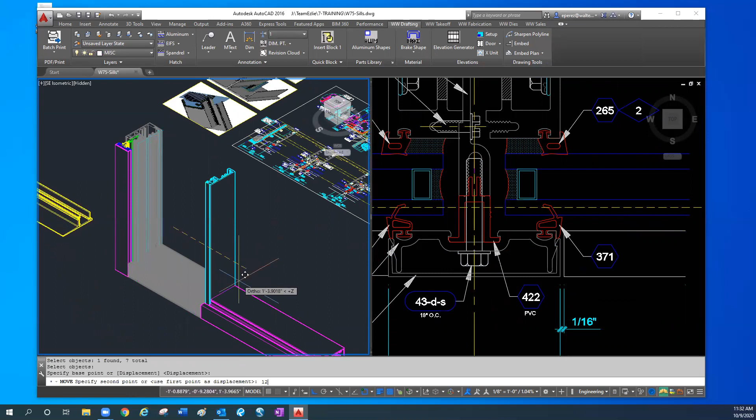So if we were to do this properly, all of this is one unit. Then the field has to come in and put this unit in. But they don't do what I just did and move it nice and horizontally. No, it's actually coming from the front down. Remember, they use their little pickers from the top, lifting a 15-foot tall unit up, then sliding it down, and then they shift it over. So they're not just doing left to right like you would hope they would.

If they can, they will. But the way our system is designed is to go from up to down. That's why you have to go up and over the chicken head. They have to go up and over the anchor bolt at the top, right? So literally you have to imagine this unit coming down.

So they don't want this metal to be scratching that metal. That little 1/16 gap just gives them a little bit of clearance when they're installing these, so they don't hit each other when they install it. And that's why it's there. It's only on one side, so that way we don't have a big gap on both sides.

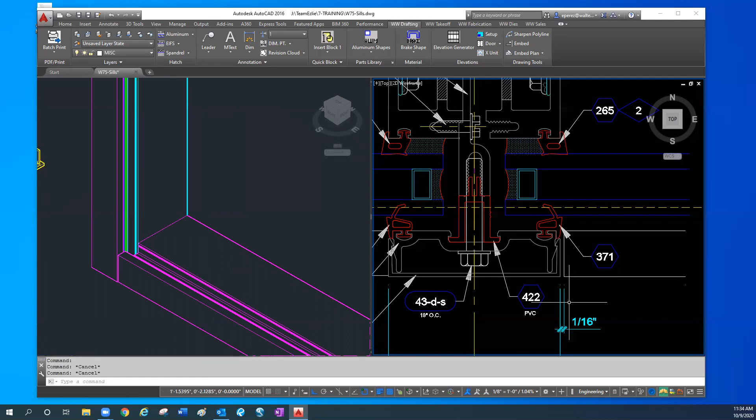I don't know if they do this, but after it's installed, the field may tap it over a little bit to close that gap, to make it look cleaner. If the shop accidentally cut this 1/16 a little big, and it's a big gap, they're going to try to make it look clean. But really it's just for installation clearance of unit to unit.

Okay, so that's on purpose, and that's only on captured to captured. So then you can see at Inviso, that's what these lines mean. At Inviso, the covers run through, the horizontal cover would run through and have a little 1/16 gap. So that's what these lines are representing, and that's why they're important to show in the details too.

So any questions on the sill, sill track, sill runner, the notches? No, I hope I covered everything. Are there anything in the details that you have questions on that maybe you just didn't understand, or maybe I covered it? You've already covered it. I have some notes written down, things that I didn't know. Okay, cool.

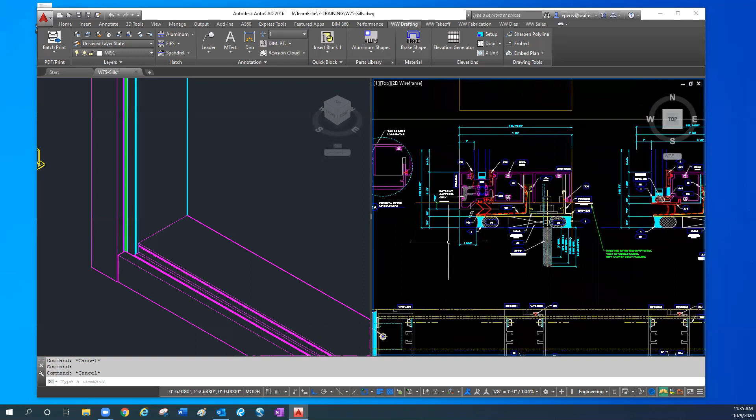All right, awesome. So for further study, there are actual installation manual sheets for these. You can open those up and read the steps, because we don't show everything. We try to show as much as we can, but the steps actually spell out the order and how they do it, the bedding, sealant, and all that kind of stuff, to kind of reiterate what I've said here.